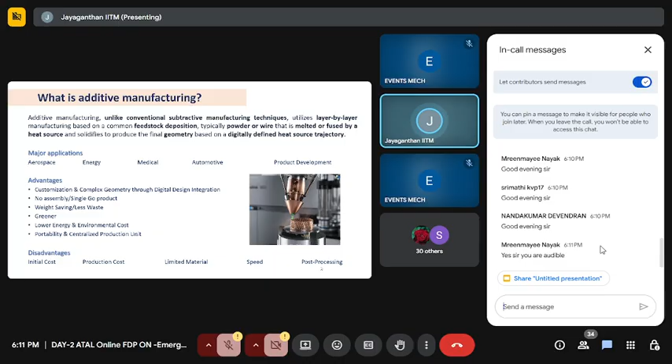I am a professor from the Department of Engineering Design, and Dr. Vinod has already introduced me, so you are all aware. I assume that most of you are from a mechanical background. You have studied manufacturing courses, kinematics and dynamics of machineries, design of machine elements, and a lot of fabrication techniques, for example welding technology and so on. So why additive manufacturing? Yesterday itself this faculty development program started, and you might have already attended sessions on additive manufacturing basics.

So before I discuss in detail today the development of aluminum alloys, note that aluminum alloys are used extensively in aerospace applications due to their very high specific strength.

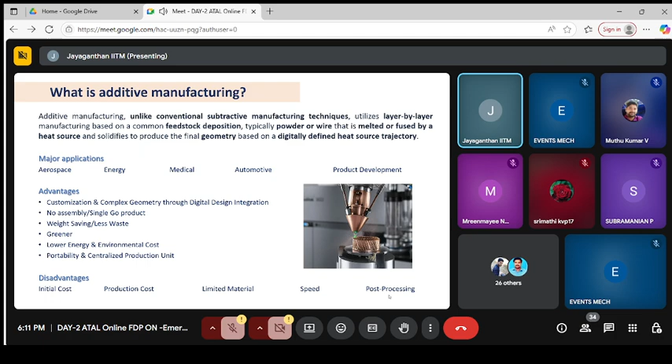Strength to weight ratio is always desirable for all automotive and aerospace applications. We always look for lightweighting, so strength to weight ratio should be very high. Right now, aluminum alloys are already being used in aerospace applications, different parts of the aircraft extensively use aluminum alloys. Of course, high-end aircraft extensively use polymer-based composites also, basically looking for very high lightweight. In fact, the specific strength to weight ratio is much higher for polymer-based composites.

You have already done a course related to manufacturing. Why additive? You know the definition of additive - we always say it is layer by layer deposition of material. Through this process, you end up getting the final shape of the component you want to produce. Rather, I call additive manufacturing a bottom-up approach.

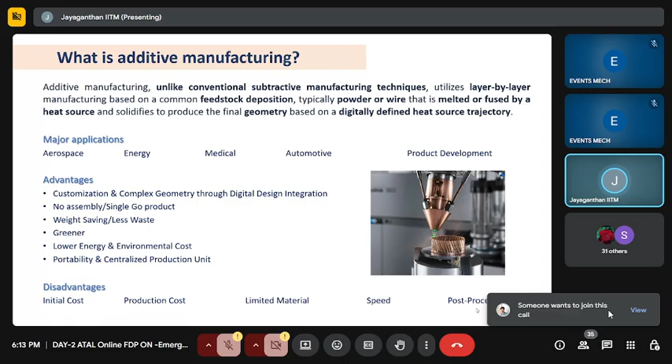In conventional manufacturing, all of you are aware how we get the final component. Right from the beginning, you have to extract the metal or alloys from their corresponding ore or mineral. The molten metal or alloys need to undergo solidification through the casting route. You are all aware about casting and foundry technology. Through casting, you end up getting different shapes - your solidified casting may be in the form of billet, bloom, or slab. You produce a variety of shapes going through this solidification route, and casting could be of different shapes - billet, bloom, slab, and so on.

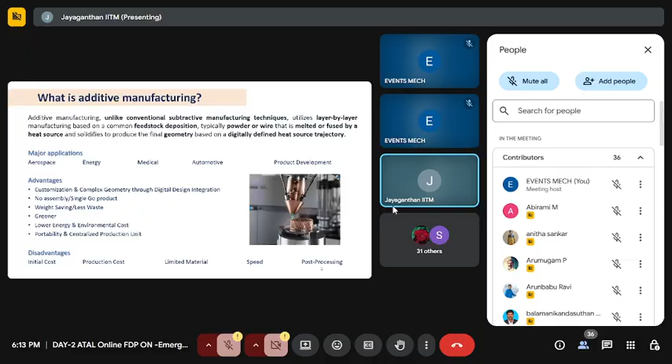These billets, blooms, and slabs are subjected to further processing. Rather, what I want to highlight before going in depth into additive manufacturing, having defined it as nothing but a bottom-up approach wherein we deposit the material layer by layer - in the process, we are also going to discuss what layer by layer deposition means, and how we make use of laser as an energy source to ensure that through layer by layer deposition of material, we end up getting the final shape of the component.

The conventional manufacturing is called a top-down approach. What do you mean by top-down approach? I produce the casting, and the casting needs to be subjected to a variety of thermomechanical processing techniques. You are all aware about forging - open die forging, closed die forging - likewise extrusion also, which has open die and closed die extrusion, and then rolling. If you want to produce a plate, we use the rolling technique, and if you want to produce wire, we use wire drawing.

That means starting with the bulk shape of the casting, you subject it to a variety of thermomechanical operations such as forging, rolling, extrusion. Finally, depending upon the component you want to produce, we make use of a variety of machining techniques to end up getting the final shape of the component. That means subtractive manufacturing is nothing but conventional manufacturing, a top-down approach - you start with the big shape and end up getting the final shape of the component. But in additive manufacturing, we directly get the final shape of the component.

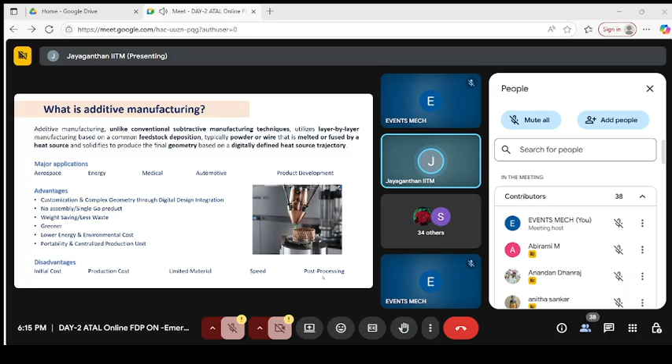Our starting material in this case is either powder or wire. The starting material to do 3D printing of any component begins with either powder or wire. I'm confining my discussion to metallic material - I'm not going to discuss any chemical-based technique for 3D printing of objects. So I want to define additive manufacturing as nothing but layer by layer deposition of material in the form of powder, and each thin layer of powder, when you put it on the build platform, we scan it with the laser.

Like in conventional casting, here in additive manufacturing, the material is spread in the form of powder, and when you scan it with the laser, it undergoes instantaneous melting followed by solidification. This also involves liquid to solid transformation - it involves a solidification process. Since we are beginning with a very thin layer of powder, it is possible to play with the cooling rate. When you use a laser source for a thin layer of powder, I can ensure the whole thin layer undergoes instantaneous melting when the laser strikes it. Basically, I can have very good control over the solidification kinetics, and I end up getting a very good, well-refined microstructure. Likewise, each thin layer, being micron thickness, when shined with a laser, ensures uniform melting of the whole powder layer.

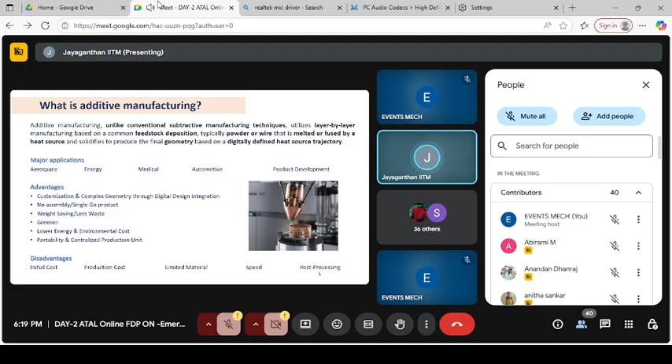Ultimately, manufacturing involves liquid to solid transformation, as you're aware. In additive manufacturing, you're able to have precise control over the cooling rate of the material which undergoes melting followed by solidification. As a result, by appropriately tuning the process conditions, you end up getting a well-refined microstructure in 3D printing, unlike in conventional manufacturing.

In conventional manufacturing, if you want to produce any component, you have to go through a series of steps. At the end, it has to go through a variety of machining operations involving a lot of material removal. Through conventional manufacturing, it takes a lot of time and results in a lot of material loss.

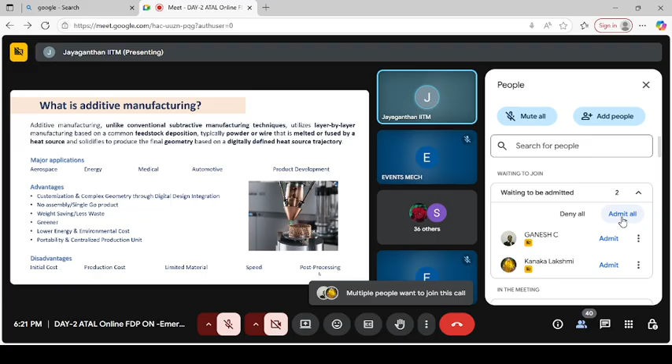So in order to overcome that, we go for the additive route. What I just highlighted differentiates additive from conventional manufacturing. Conventional manufacturing is called subtractive—you begin with a big object and reduce its dimensions to ultimately get the required size and shape of the component. Subtractive manufacturing involves a variety of steps and techniques. There's a lot of material wastage, a lot of time involved, and producing any intricate shape and dimension is very tedious in conventional manufacturing.

Additive manufacturing, as I mentioned, uses a bottom-up approach. We'll also discuss how the process takes place during 3D printing. In 3D printing, we normally give a CAD file from the computer—basically an STL file. When you give the STL file to the printer, the printer understands what kind of shape and size of the component needs to be produced. The printer understands the kinematics—what kind of movement is required—depending on the STL file given. So the laser will accordingly try to do scanning over the thin layer of powder.

I'm also going to show the figure. So hope it's clear right now—I'm just defining what I mean by additive manufacturing and how it's different from conventional manufacturing. And as for advantages, you can see any complex shape can be produced.

Weight saving is going to be much more green compared to the conventional manufacturing technique. In terms of environment also, it is not going to be harmful. And portability—wherever you want to produce the component, we can take the machine there itself, and it's possible to produce the kind of component you want.

The disadvantage is that the initial cost is going to be high, but it can offset. For example, if you take an aero engine component, looking at material cost through conventional manufacturing, we cannot generalize—in some cases cost may be prohibitive, but not in all cases. For aero engine components, additive is better than conventional manufacturing.

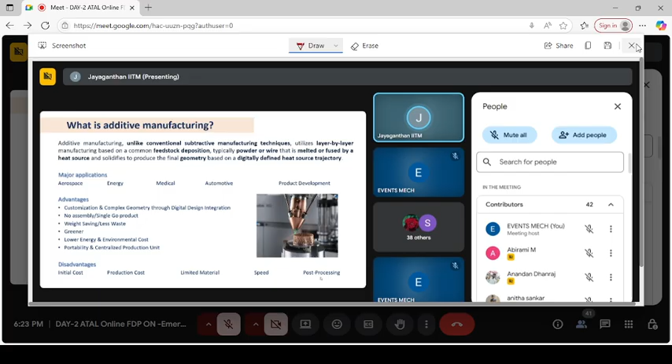Additive has limited material options—we cannot print just any material. First, the powder or wire used for 3D printing needs to be qualified. Does the powder qualify for 3D printing? Powder characteristics in terms of size, shape, purity, and flowability all need to be ensured before taking it forward for 3D printing.

Unlike conventional manufacturing, where we have casting going through a variety of stages requiring a lot of post-processing, the number of post-process steps involved in additive manufacturing is relatively very, very less compared to conventional manufacturing technique.

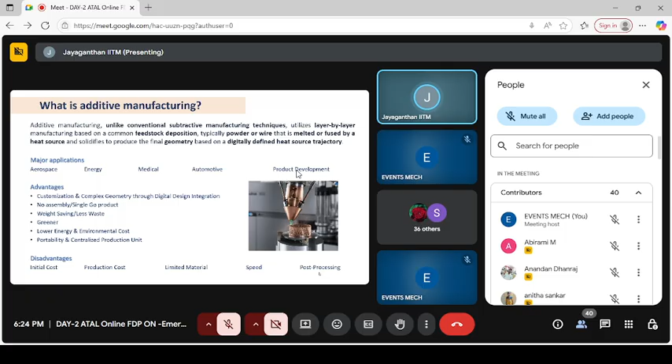And again, if you look at this slide—I hope I'm audible, Dr. Vinod. In between I'll be asking whether I'm audible or not. Yes sir, you're audible, sir.

Please look at this slide, left side—we compare additively manufactured components with traditionally manufactured components. Additive is suitable for low volume production, for example a patient-specific implant or a high performance aerospace engine component. So for low volume production, you can always prefer additive.

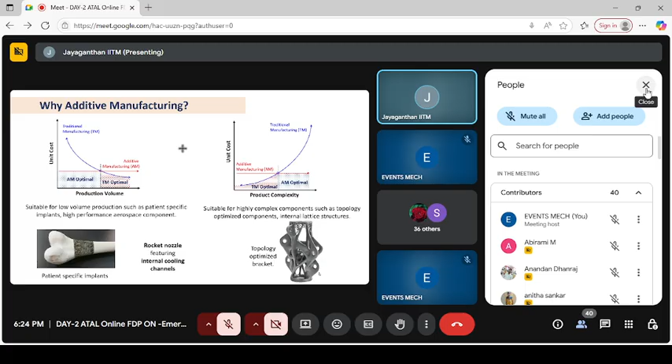On the extreme right, if the shape and size of the final component is very complex, it's better to go for additive rather than conventional. The reason is that producing an intricate shape conventionally might involve a lot of material removal, and you may not end up getting the exact dimensions you're looking for. That's the beauty of going through the additive route.

With the additive route, we begin by giving an appropriate CAD file, and we can do a priori topology optimization for the component through software. At the bottom, we can produce a person-specific implant, and also—as in the satellite rocket example from NASA—a lot of internal cooling channels can be directed to 3D printing.

When it comes to cooling channels, we talk about heat exchangers. The internal feature sizes of a heat exchanger always lie in the range of micron, submicron size. These micron and submicron level features can be produced easily by 3D printing compared to conventional, which is very tedious—you may not be able to maintain the exact size and shape of the submicron features. That's why it's better to use 3D printing.

Just giving one more example—on the extreme right you see a bracket, which may be taking either static or dynamic load. This topologically optimized bracket can be directly 3D printed. So for low volume production, and for highly complex shaped parts, go for additive. The reason is that conventional manufacturing involves a lot of material removal and you may not end up getting the required size and shape of the final component. We are just comparing conventional manufacturing with additive.

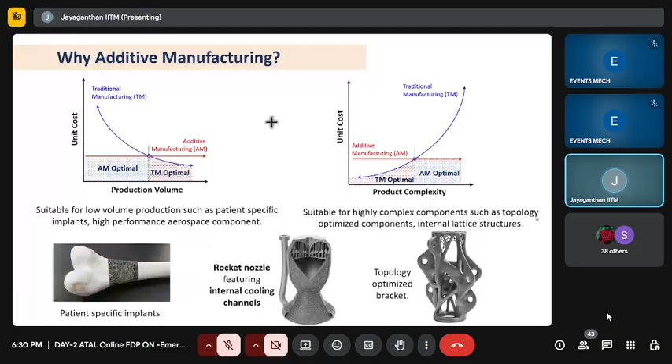That is utilized only for making very complicated size and shape of components, for example the topology optimized bracket I showed in the previous slide — a very complex shaped geometry. Looking at the internal size feature, if it is a few microns or submicron thick, you should always go for the extreme left option.

I'm just saying that with respect to use case or application, you have to pick the appropriate additive manufacturing technique, using either laser or electron beam melting. I'm trying to highlight metal-based 3D printing and what techniques are available. We have a lot of 3D printing machines in India, but if you do proper auditing, you'll find more than 50% of the machines are idle.

A lot of private players buy the machine and only want academic institutions to come and do printing, paying money to them. Some companies come forward to collaborate and try to develop prototypes jointly. But most of them just buy the machine, and it is not being effectively used. Simply, it is imported from abroad.

For information, 3D printing machines are now made indigenously in India. There is one company, Intech in Bangalore, that produces low cost 3D printers. It's now possible to get a 3D printer for just 70 lakhs, whereas it used to cost 3 crore, 4 crore. Now the price has come down.

We are equally capable of producing indigenous machines for electron beam melting as well as selective laser melting. The laser source is critical for developing a 3D printer, and laser sources are also made in India. If you are aware of RRCAT, one of the Department of Atomic Energy units, they are also producing laser sources there.

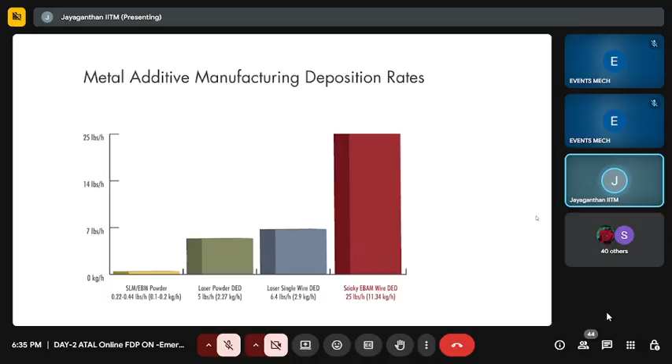At the end, you will be able to make the actual machine. Once your design details are clear, having done the simulation, you can take these details to a manufacturer who can assemble each individual part. As I mentioned, you can buy the laser source from India, and you can buy individual spare parts and assemble them. It's possible to make a 3D printing machine this way. If you look at the extreme left, basically we have a vacuum chamber where we can make use of inert gas like nitrogen or argon gas.

Extreme left, what you see is basically the build platform. You just put a thin layer of powder, and we use a recoater blade to ensure we have a uniform thin layer of this powder.

When it comes to the extreme right, you can see the role of the laser beam, so it does scanning. There are several scanning patterns, it can be zigzag pattern, meander pattern, the way it has to scan. That depends upon what kind of typical dimension you require for the particular final component you want to make.

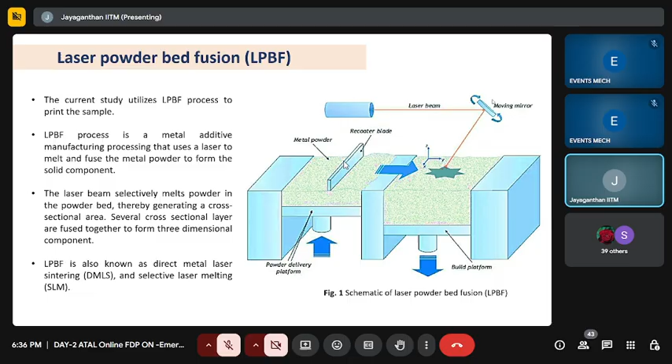So laying a thin layer of powder, scanning it with a laser, is done repeatedly layer by layer. The layer undergoes melting and solidification instantaneously, it forms a thin solid, and again a second layer of powder is laid over the platform. Again, laser is scanned. This process is continued, ending up in getting the three-dimensional shape of the final component you want to produce.

Before you go for making the actual component, what they try to do first is establish properties for the material. For that, they try to print a test coupon. What do I mean by test coupon? First of all, you have to ensure the material being printed through this laser-based technique has its material property ensured. I cannot go straight away for printing the final shape of the prototype.

My seminar is basically to characterize 3D printed material, where it is capable of providing desired mechanical properties similar to conventionally cast material. You can say it may be wrought alloy or cast alloy.

First, you need to qualify the material property. Material is being produced through 3D printing, we call it a test coupon. Once you ensure the test coupon material printed provides required static and dynamic properties. When I say static properties, I'm talking about tensile strength, compression strength, and fracture toughness. When I say dynamic properties, I'm talking about fatigue strength, and cyclic load, how the material is going to behave.

Once you establish properties of the material which is 3D printed, then I can take the material property as an input to design the prototype. What is a prototype? Prototype is nothing but the material with the required property that has taken a particular shape and size, that I call a prototype.

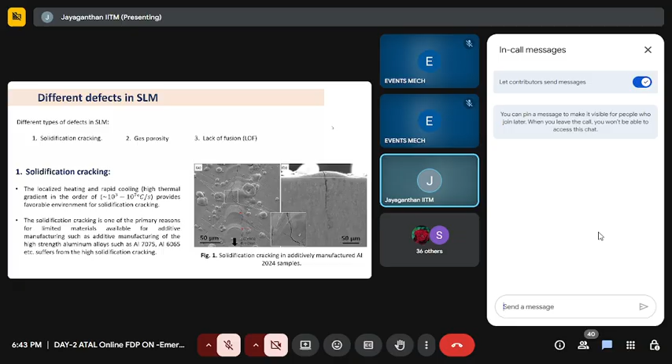Internally in casting you might have some cracks; this is one of the major issues. There could also be porosity, which forms due to complex phenomena associated with the laser powder itself. If you don't use appropriate laser energy, you end up seeing this kind of problem, for example metal may evaporate, which in turn causes entrapment of gases.

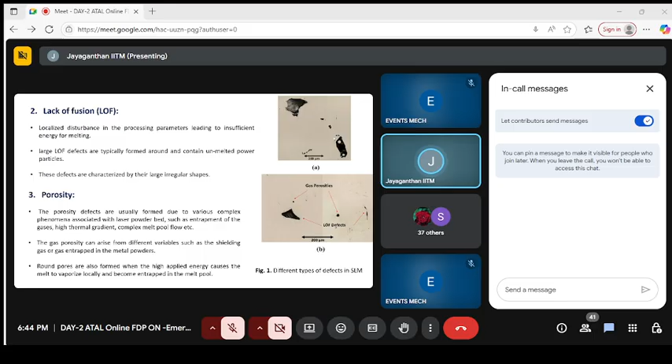That's where laser energy density needs to be known for each material. Laser energy density is expressed as E equal to laser power P divided by scanning rate and hatch spacing. Hatch spacing is the distance between two adjacent beams, the interlayer distance. That we call hatch spacing, and then there's layer thickness. All these parameters are used for a given powder.

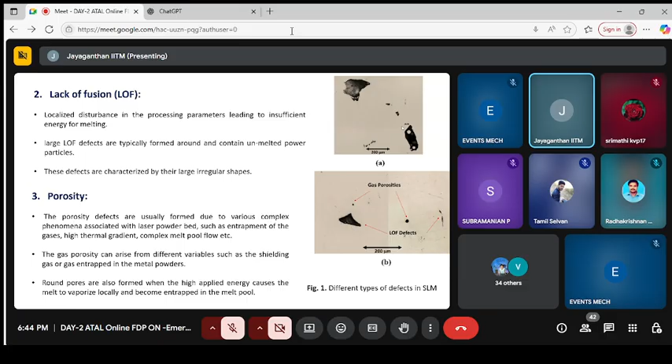If you don't account for appropriate laser power, or laser energy density, you end up seeing the problem of porosity or even lack of fusion, whether due to under-melting or even vaporization. All these problems are encountered if you are not properly accounting for the process parameters used in selective laser melting, also called laser powder bed fusion.

All these effects are seen if you try to print aluminum 2024 or 7075 alloy, because a very huge cooling rate is imposed on the material when you do 3D printing. We've seen the cooling rate is of the order of 10^3 to 10^7 degrees centigrade per second. Because of differential expansion and contraction, you cannot escape the formation of cracks when you go through 3D printing, even through the conventional casting route.

Before I discuss 2024 being 3D printed, why do I have to go for 3D printing 2024? Rather, my discussion is about 2024 alloy added with titanium. That is the main focus of my talk today.

Aluminum 2024, if you do direct 3D printing, you encounter all these kinds of problems. Even if you account for proper process parameters, due to differential expansion contraction, solidification cracking cannot be avoided. Maybe you'll be able to take care of lack of fusion and gas porosity, but solidification cracking you are not able to take care of when you go through 3D printing, even with appropriate process parameters.

Then what is the remedy? That's what I'm going to discuss now. Before we discuss how 2024 is modified before we go for 3D printing, let's look at what is the specialty of this 2024 alloy, and look at the particular alloy composition.

Aluminum is the major principal element. What are the other alloying elements? You have copper, magnesium, titanium. Each series - 2000 series, 5000 series, 6000 series - each is unique with respect to a particular use case, unique in terms of what kind of property it can provide. I'm referring to 2024, made up of major element aluminum, plus copper, magnesium, titanium.

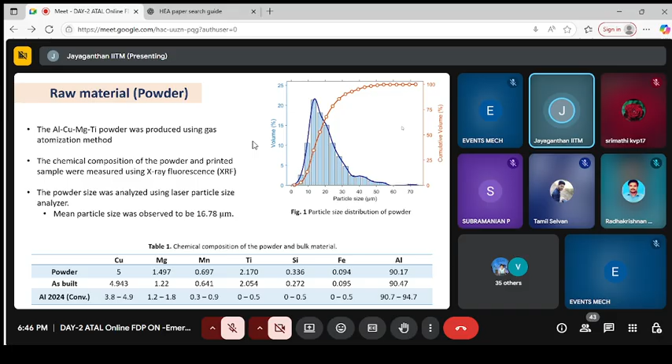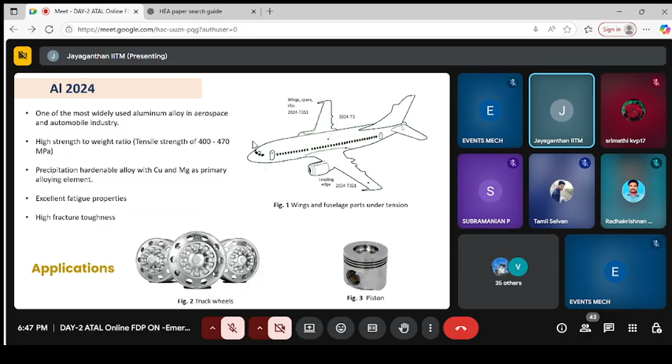Strengthening mechanism in the sense, why are we adding additional alloying elements? Why not use pure aluminum? Pure aluminum cannot give the required mechanical properties. That's where we add further alloying elements. These alloying elements end up forming different phases, different precipitates, and those precipitates contribute to strengthening the alloy.

When I say strengthening the alloy, we want to improve the tensile strength without losing the ductility. We want the combination of both strength and ductility, as well as improve the fatigue life - how the component behaves under dynamic load. That's why we're adding alloying elements: they account for improving or strengthening the alloy properties. That's why it is a precipitation hardenable alloy.

Copper and magnesium form precipitates - that's what we are going to discuss. You can see the wing parts, spars, ribs - they're all made using 2024 aluminum alloy. At the bottom, you can see the leading edge. The wings and fuselage parts in the aircraft are fabricated using aluminum 2024 alloy. Also, automotive applications like truck wheels are fabricated using 2024 alloy, and pistons also are made using aluminum 2024 alloy.

As I mentioned, you always end up seeing solidification cracking - you see the microstructure cracking if you do 3D printing of 2024 alloy. This is a major problem due to differential expansion and contraction; when solidification takes place, we end up seeing the crack, as shown in figure one. Also, through the additive route when you do 3D printing, at a much bigger length scale - 50 micron length scale - we get what's called columnar grain, looking like a pillar-like structure. Columnar grains also don't provide the desired properties, unlike, for example, equiaxed grains.

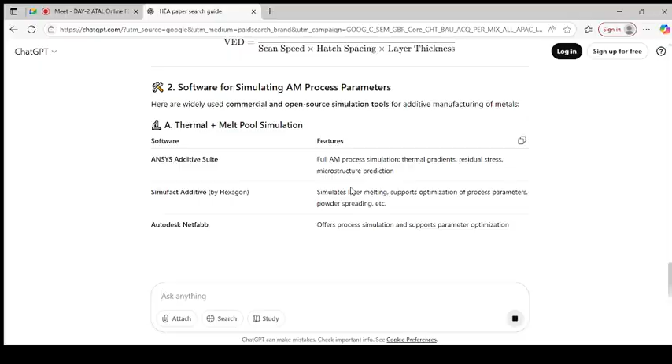We already made a virtual prototype, and we are in the process of making the real prototype engine mounting bracket, which is currently being printed. Once we do 3D printing of the engine mounting bracket, we'll give it to NASIC, Indian Air Force. They'll be able to do field testing and then qualify the particular bracket. Once it is qualified, in future, like we talked about Atmanirbhar, we want to make everything indigenously wherever possible.

It means we start with the material, we establish properties through virtual simulation. Anything you can make through simulation, you can virtually create. We made a virtual prototype, and now, since we have all design details and process details, we are in the process of making the actual prototype.

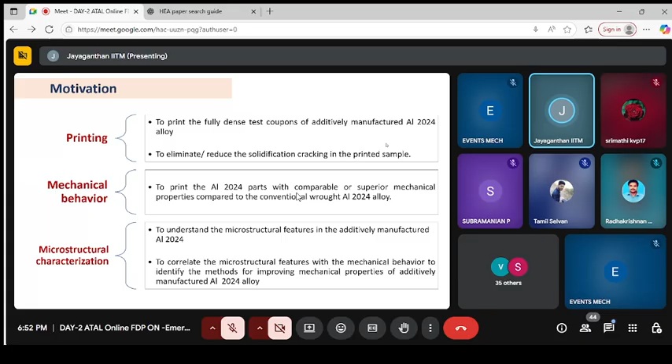Once you do 3D printing, before you try to do mechanical testing, the internal microstructure needs to be thoroughly characterized. I'm also going to discuss what microscopy we use to understand the internal microstructural features. The reason is, it's not only the chemical composition of the alloy, we need to account for the internal microstructure, looking at internal grains or crystal size.

You're all aware that any metallic material is called polycrystalline, meaning it's made up of several crystals or grains. Several grains aggregate to form the microstructure. When you look through the naked eye, it's a continuum, but if we see through the microscope, it is basically a heterogeneous microstructure.

Depending upon the alloy, we need to see whether it is a single phase or two phase alloy, and what kind of crystal structure it has. All such things are equally important. At the microstructural length scale, going from submicron to millimeter, size and shape matters. At the macroscopy level, the dimension of a component influences what kind of stress it is going to accumulate.

You've done rigid body mechanics, where you do force balance, and strength of materials or deformable body mechanics, where depending upon the complexity of the component, when it takes up load, if it deforms, we have to account for that, including plastic strain. At the smaller length scale too, as a mechanical person, I always look at any object's dimension - its length, breadth, and width.

Same thing, you try to visualize at the material length scale, everything at the micron, submicron, and millimeter length scale. What is the internal grain or crystal size like? Is it spherical, non-spherical, needle-like structure? I mentioned about lamellar morphology, it looks like a plate-like structure. Each internal feature I look at as a mechanical person - what is the geometrical feature?

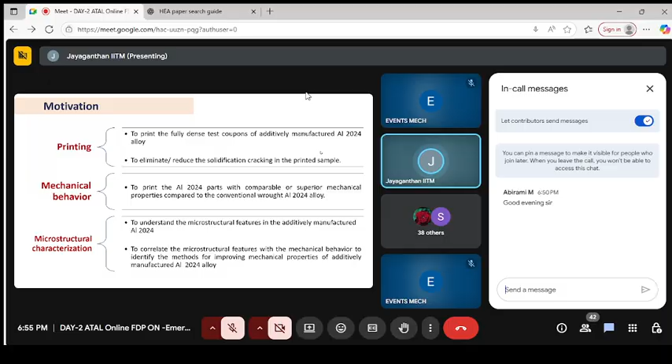For structural application, we are looking at load-bearing applications where mechanical properties are critical. We need to see how the microstructure is going to influence a property. That's why we are concerned - when you do 3D printing, the process is going to influence microstructure, and microstructure in turn is going to dictate the property. That's why we need to understand and critically control microstructure.

That's why it's called microstructural engineering of material produced by several routes - it may be casting route or through 3D printing route. What I mentioned earlier was one unique feature of 3D printing - you're able to have precise control over the microstructure being formed through layer by layer deposition of material. Unlike conventional manufacturing, where you start with a very big chunk of mass that undergoes melting and solidification - you pour the molten metal into a mold, a very big shape, and you cannot have uniform cooling from surface to bulk. That's why you end up seeing heterogeneous microstructure.

Surface may be well defined, but if you go internally across the cross section, the core will have segregated microstructure - rather, we can say dendritic microstructure and so on. I'm talking about the huge variation in microstructure properties when you look at a conventionally manufactured part. Of course, we do further post-processing to make it a homogeneous structure. We're just comparing one to one - how unique the 3D printing technique is compared to conventional, being a bottom-up approach, they're able to have precise control over melting and solidification.

So methodology - we did 3D printing, and the sample was printed in horizontal direction as well as vertical direction. Then we gave post-processing heat treatment as well. So any material produced by a different route, we have to look at as the as-fabricated sample, followed by post-processing if it requires. Predominantly we play with the heat treatment - most conventionally produced material, we always play with heat treatment to improve the properties further. Once you give the heat treatment, again the microstructure undergoes transformation.

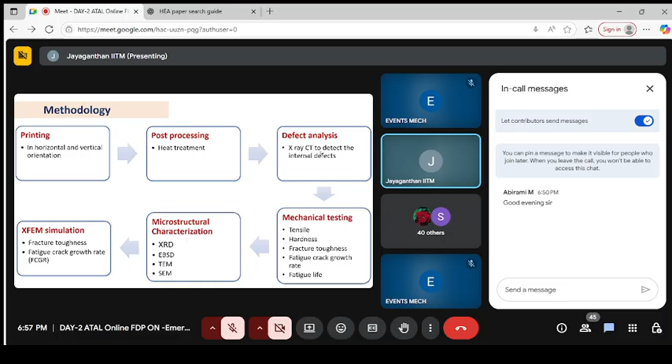So after post processing, for the 3D printed sample we did NDT analysis through X-ray CT scan to see whether there are any internal defects in the 3D printed sample or not. Having done thorough characterization for the as-printed sample upon heat treatment, followed by analyzing internal defects using X-ray CT scan, all the 3D printed samples - I mentioned the 3D printed test coupons - went through all testing: tensile test, hardness test, fracture toughness, fatigue crack growth rate, fatigue life, and of course microstructure characterization using XRD and EBSD, electron backscatter diffraction.

Again, I will discuss how the feature size looks like if you do EBSD. We also have TEM, transmission electron microscopy, and scanning electron microscopy. All these techniques were used to characterize the physical features of the material, which is 3D printed.

Of course, we did FEM simulation also for all the properties. FEM simulation and XFEM simulation is a unique technique if you want to account for discontinuity in the material, like a crack or discontinuity. You don't require mesh refinement, remeshing is not required if you make use of the XFEM technique, but I will not cover that right now.

I only want to discuss how we did 3D printing, their mechanical properties, how they look as printed sample, and then post-processed sample. And we went through characterization to look at their internal microstructural features that are internally related to the properties actually.

And again, what I mentioned was, for aluminum 2024 alloy, you have a problem of solidification cracking. What we did in our work, we added 2% titanium to the starting alloy, aluminum 2024, whose composition I already mentioned.

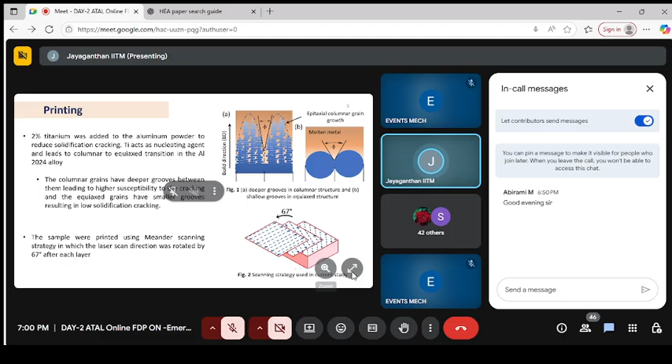So you try to see extreme left and extreme right. If you use pure aluminum 2024 alloy without adding titanium, you have a columnar-like structure, pillar-like structure. And you can see in between two columnar grains you have a groove, a deep groove - that is the one being the culprit for inducing solidification cracking.

But if you use 2% titanium added to the aluminum 2024 alloy, it refines the microstructure. The so-called equiaxed structure is spherical, they are all same dimension in all directions. So the cavity, the groove, is completely filled with the molten metal. We end up getting equiaxed structures.

So it's able to take care of solidification cracking. Titanium is acting as a very good grain refiner. So with 2% titanium added aluminum 2024 alloy, if we do 3D printing, we are able to overcome the solidification cracking - that's what we want to highlight.

2% titanium has been added to aluminum 2024 alloy. The starting alloy powder itself contains 2% titanium that acts as a grain refiner - that's why we mentioned the bullet point: the columnar grains have deeper grooves between them, leading to higher susceptibility to cracking, while equiaxed grains have smaller grooves, resulting in very low solidification cracking.

So how do we take care of solidification cracking? We added titanium as a grain refiner. As I mentioned, during solidification, the liquid to solid transformation, it's possible to control the microstructure being formed. I already mentioned columnar structure, equiaxed structure, lamellar structure - there are different morphologies, going down the length scale from millimeter to micron, submicron.

The internal microstructure - I'm looking at the physical feature, size and shape of the particular grain or crystal. The equiaxed structure is desirable for 3D printing of titanium-added aluminum 2024 alloy. The role of titanium is that it's able to modify the grain shape from columnar to equiaxed structure.

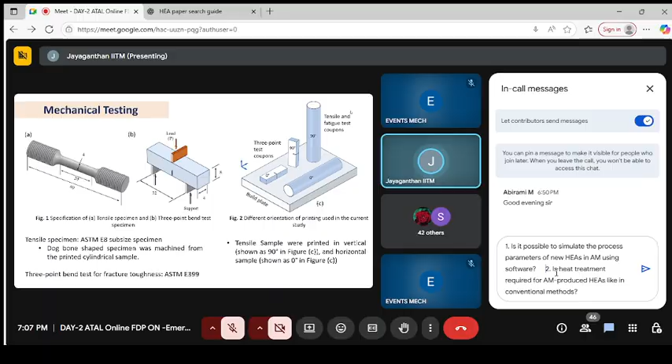Again, samples are fabricated vertically built or horizontally built - the orientation also matters. Different orientations of the printed sample, that also we used. Tensile samples were printed in vertical direction as well as horizontal direction, because we want to know whether orientation is going to matter for the final properties of the material being 3D printed.

So we went through all this testing, different test coupons were made. The defects were also analyzed through X-ray diffraction and X-ray CT scan.

Internally, if you have not accounted for proper process parameters to do 3D printing, I would like to highlight once again: laser energy density, expressed as capital E, is laser power P divided by scan speed, at what rate you're scanning the laser over the powder. And then I mentioned about hatch spacing.

We have a laser beam, two adjacent beams - what does that distance actually mean? Whether you're using lower hatch spacing or higher hatch spacing, that is going to matter a lot, connecting to deposition rate. And then the layer thickness.

In laser powder bed fusion, on the build platform, you lay one thin layer of powder. You need to know the thickness of the layer, the laser scanning rate, and the hatch spacing to the adjacent laser beam - I'm referring to the laser beam's spot size. So hatch spacing also plays a role in determining what appropriate energy density should be used for 3D printing of your material.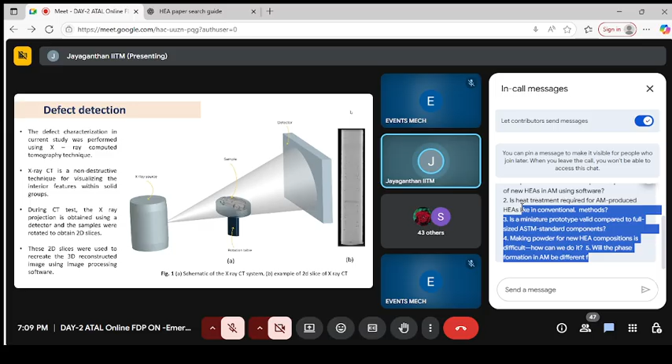So these internal defects - why do we use X-ray CT scan? The internal defects are not visible to the naked eye. It may be micron size pore or even millimeter size pore. Millimeter size pores you can see through the naked eye, but if it is micron or submicron, I have to do X-ray CT scan to analyze internal defects.

Once again, when you do 3D printing, what is the final density of the 3D printed part? It cannot be 100%, because powder is undergoing melting and solidification. Even accounting for optimized process parameters, the density can never be 100%. There could always be internal defects, minor porosity content.

That also needs to be analyzed through X-ray CT scan. We will come to know whether it is a poorly packed 3D printed part, and what the internal defects are, for which you need to do thorough scanning through X-ray.

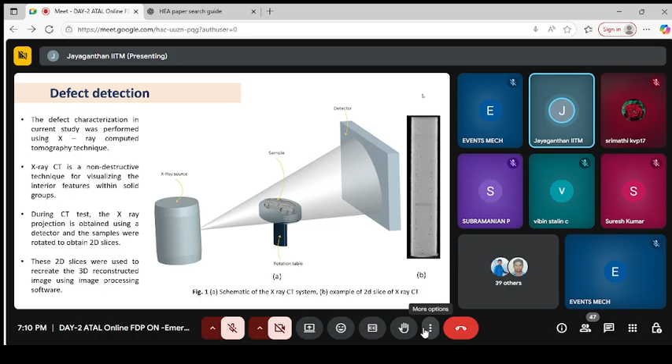3D printed material should undergo thorough scanning through X-ray. Please see what the defect is - not only seeing the presence of defect, but what is the quantity of defects being present and how they're distributed. That also needs to be quantified for 3D printed materials.

That again we try to relate to thermal gradient. Obviously cooling rate and how the heat dissipation occurs matters a lot depending upon whether it is vertically built or horizontally built. We are trying to highlight that horizontally built samples have a lot of defects due to thermal gradient compared to vertically built samples - the way heat is dissipated when it undergoes controlled solidification from liquid to solid transition.

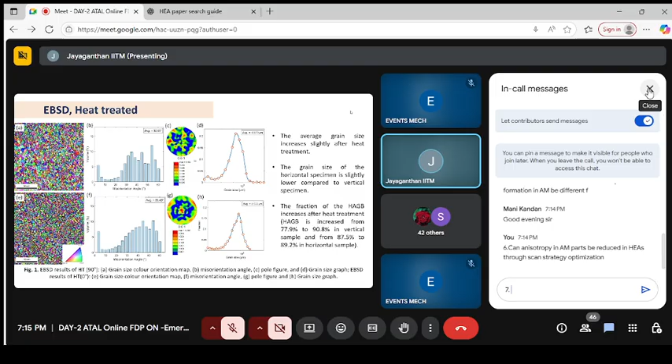That also we want to characterize - what is the volume fraction of high angle grain boundaries and low angle grain boundaries and so on. That is also what we are saying with the heat treatment - what is happening to the horizontal build sample and vertical build sample. And then if you do X-ray diffraction, you can see at the bottommost.

We have seen the physical features. As I mentioned, the alloy containing aluminum plus other alloying elements - they have the powder, we did 3D printing. For the 3D printed sample, we have to do X-ray diffraction to see what phase it shows.

You all know the meaning of phase - we have solid phase, liquid phase, it may be vapor phase. Ice is solid - it undergoes melting to liquid, and if you boil it, it goes to vapor state. Solid state, liquid state, vapor state - we call it a phase. Within the solid itself, we have seen the microstructure. What is the morphology? When they mix up with each other, how many phases do they end up forming?

Is it going to be single phase? It will have only one single crystal structure. When they say two phase alloy, the two phases will have different crystal structures. When you add alloying element, to what extent can you keep adding before they end up forming an alloy or solid solution? There is a limit beyond which they end up forming another unique phase.

That's where we end up doing X-ray diffraction, right from the powder. We did as-built sample, 3D printed sample, vertically built at 90 degrees, horizontally built at 0 degrees, and heat treatment also for both samples. And what did we see? What phase is observed?

The primary element for this alloy is aluminum, indexed in this X-ray diffraction as alpha phase. Having alloying elements like copper and magnesium, we end up getting a unique peak for the presence of a precipitate, that is Al2Cu precipitate, which we call theta, having a particular crystal structure.

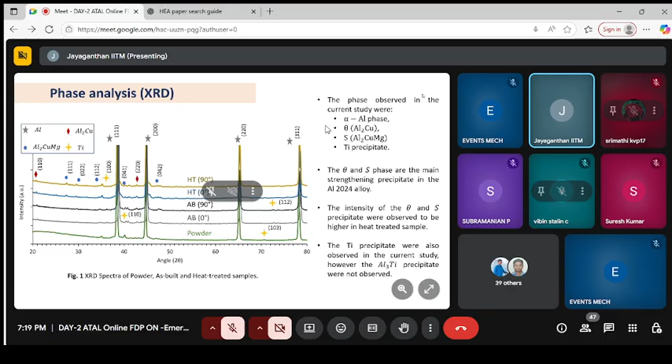For the post-processed and heat-treated sample, the intensity of the precipitate has evolved in size and shape by giving heat treatment. Titanium also was observed, but in the form of pure titanium, not in the form of a compound like Al3Ti precipitate, which were not observed in our study.

Again, looking here through scanning electron microscope, what do we see, whether we get any signature for the presence of titanium. SEM was not giving a detailed picture. By doing TEM, we are able to identify it.

The transmission electron microscope is another technique wherein we can go much deeper in length scale. We can look at nanoscale pictures, even atomic length scale, nanometer length scale. If any precipitate phases are found, we can detect it through this transmission electron microscope.

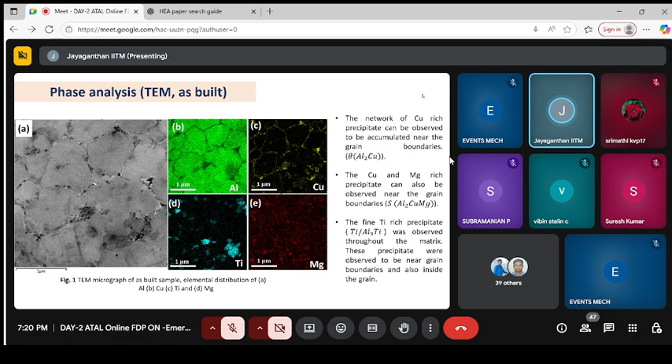Having mentioned that it tends to form theta precipitate and S precipitate, their typical precipitate size is almost submicron size, which we wanted to highlight by doing TEM. We did this for as-built sample as well as heat-treated sample. Their size and shape tend to change. We characterize the precipitate formed through SEM and TEM to look at morphology, how they look like.

Having done a complete tensile property and hardness property study, what I want to conclude, if you look at, you can see on the extreme left. Hope this slide is visible for all of you.

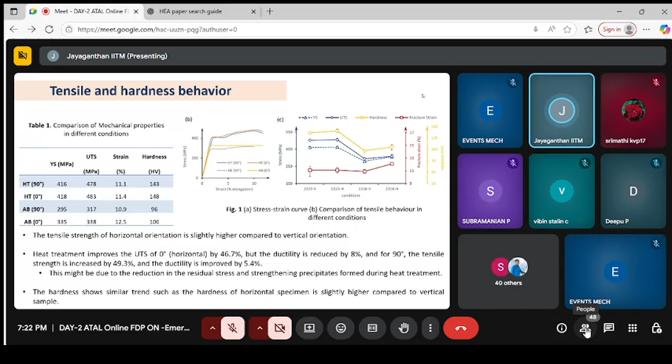Just to highlight what you see in this stress strain curve: AB refers to as-built sample, HT is heat-treated sample. We want to highlight the tensile strength and hardness. To generalize, the heat-treated sample provides better properties compared to the as-built sample, even as compared to conventionally prepared material - they provide better properties for both as-built sample as well as for heated samples.

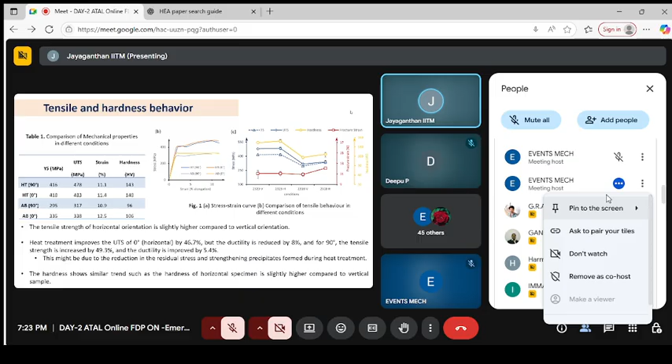Having done the tensile test, we want to understand the mode of failure, so we have done thorough fractography. For any failed sample, we want to understand the microstructural mechanism - what has contributed to the failure of the sample. This can be done by using SEM-based camera as well as by TEM.

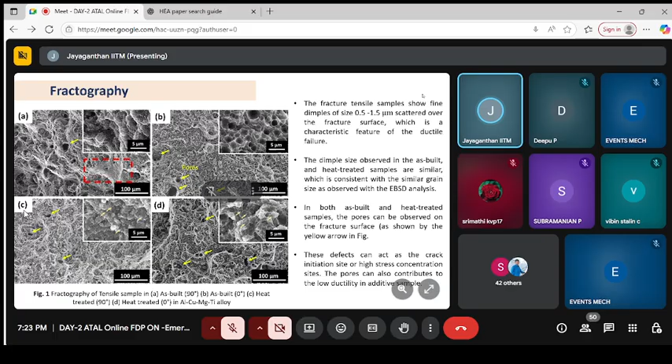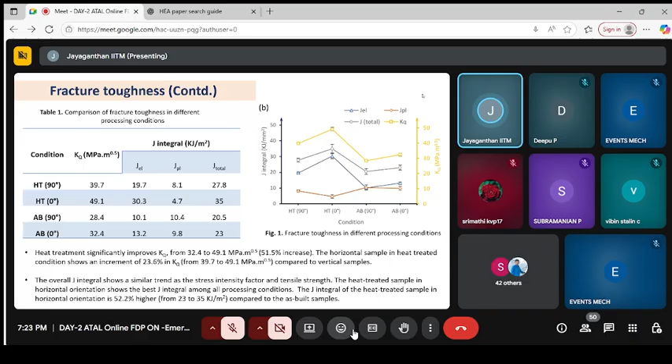We also did a 3-point bend test to study the fracture toughness of this 3D printed material. We are able to show that the heat-treated sample provides better property. There we use a term called fracture toughness KQ and the J integral. The J integral takes care of how much plastic strain the material can take, which indirectly dictates what would be the fracture toughness of the 3D printed sample as well as the post-processed sample.

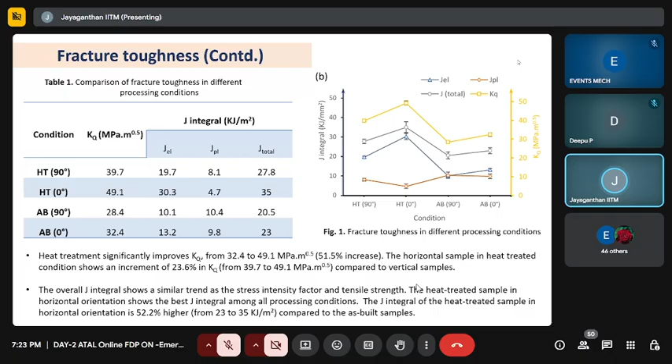What I want to highlight, you can see from this table, the heated sample provides better fracture toughness.

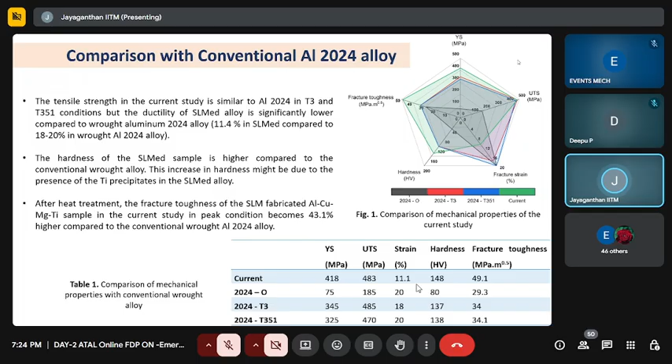To highlight this whole discussion, for the 2024 alloy produced by other routes - 2024 O, T3, T351 - these refer to different heat treatments. We have compared material produced by 3D printing, our titanium added aluminum 2024 alloy, looking at yield strength, ultimate tensile strength, percent strain, hardness and fracture toughness, compared with a conventionally prepared alloy. You can see this from the table.

This slide also compares additively prepared 2024 alloy. I have to benchmark - just doing printing, characterizing, and reporting has no meaning. What I produced must be compared with what is already known. That is shown in this slide - you can see yield strength, ultimate tensile strength, hardness, everything is depicted here.

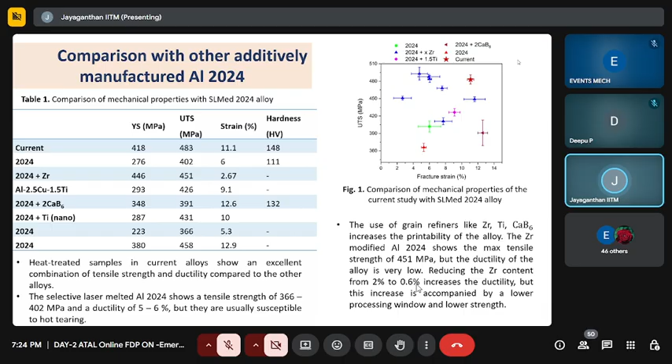Numerical simulation I'm not going to discuss right now.

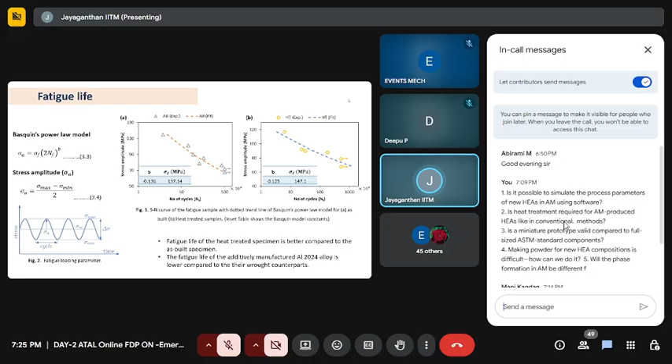Stress amplitude is connected to sigma f, which is the fatigue strength coefficient. N is nothing but number of cycles. B represents the strength exponent. So we have the values b and sigma f having fitted the experimental data to this power law fit.

We are basically quantifying high cycle fatigue, and on the extreme right side we also show the heat treated sample. We want to highlight that the fatigue life of the heated sample is better compared to the as-built sample, due to microstructural refinement or transformation. The heated sample provided better fatigue properties. Again, stress versus number of cycles to failure - look at the loading pattern.

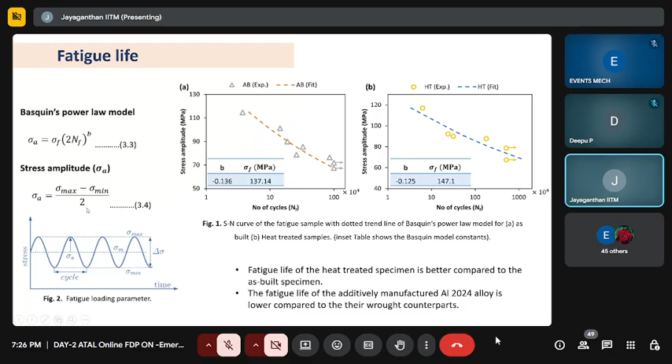Look at the loading pattern. We use the term stress amplitude when it comes to fatigue life - you should know what is stress amplitude: sigma max minus sigma minimum by 2, this we call stress amplitude. You need to understand the different terminology when you want to study fatigue life.

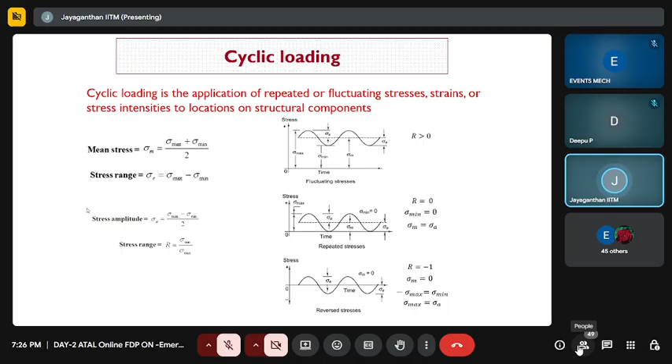What do I mean by mean stress? Mean stress is sigma max plus sigma minimum by 2 - you are applying the load maximum to minimum, that is mean stress. Stress range is the difference between sigma max and sigma minimum. Stress amplitude we highlight as sigma max minus sigma minimum by 2. Stress range, capital R, is the ratio sigma minimum to sigma max.

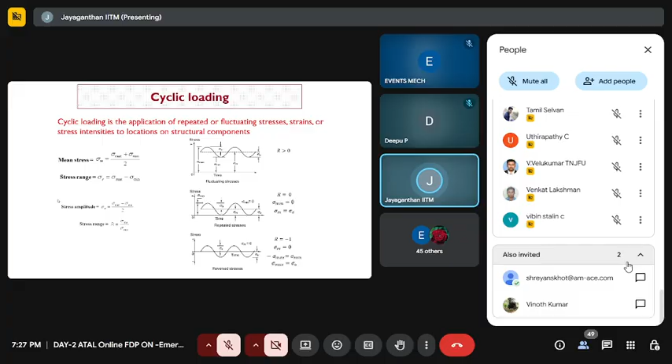We want to look at the loading pattern of the parts. When you do fatigue testing of any material, you need to understand all these terms: mean stress, stress range, stress amplitude, stress ratio capital R. Look at the different loading patterns - if it happens to be fluctuating stress, R is greater than 0. If it happens to be repeated stress, R equals 0.

Having defined stress range as sigma minimum to sigma max, if it happens to be reverse stress, look at the R value. We do fatigue testing of the sample with respect to what R value is being kept. The loading pattern could be periodic, or even a variable loading pattern with variable amplitude. We are trying to highlight the role of mean stress, stress range, stress amplitude, and stress ratio - whether the loading pattern is fluctuating stress, repeated stress, or reverse stress. When I say reverse stress, what do the plus and minus signs indicate?

You will have tension, or tension-compression, or compression. So with dynamic loading, when the load is acting on the sample, is it tension or tension-compression? You should know the loading pattern. That's where we characterize in terms of fluctuating stress, repeated stress, and reverse stress, and so on, when you do fatigue testing of the sample.

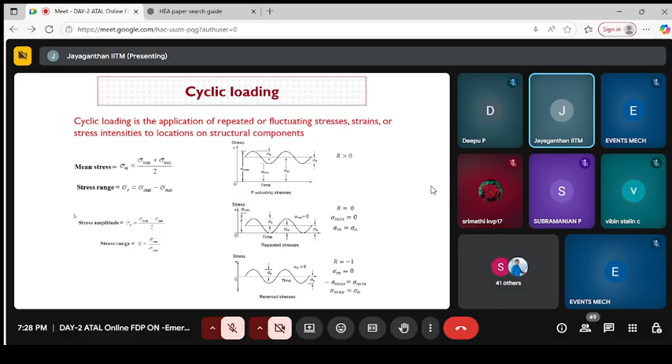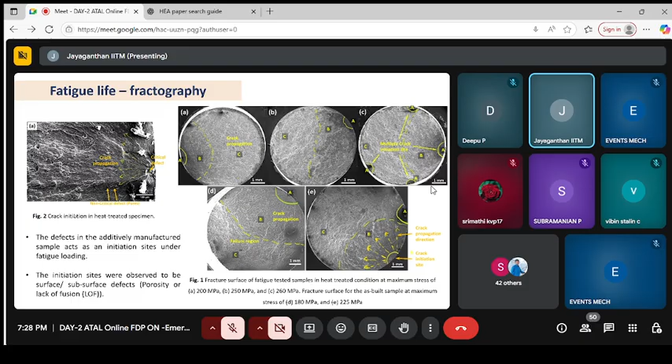In the previous discussion, we assumed you are applying the load under dynamic conditions - tension, compression, or a combination of both - without accounting for the presence of internal cracks. The moment you have a crack inside the sample - I mentioned it might have pores or cracks inside the material - you need to understand the role of cracks or flaws present in the material.

That's where we need to do fatigue crack growth studies, for which you can make use of a CT sample, compact tension sample. Again, using a UTM machine, you can apply the load and continuously track the growth of the crack, how it moves across the cross section of the sample.

We want to understand at what rate the crack is moving. In a metal sample, the crack will move very fast under dynamic load conditions with fewer cycles, and the sample will fail. That's why it's important to understand how a crack present in the material behaves when load is applied dynamically due to tension-compression. As compared to the grain size responding to the applied load, the internal crack tends to respond faster, moving across the cross section. When it moves fast across the cross section of the specimen, the sample ends up breaking into pieces.

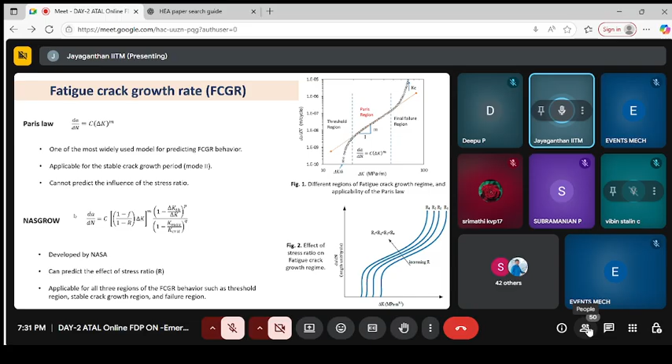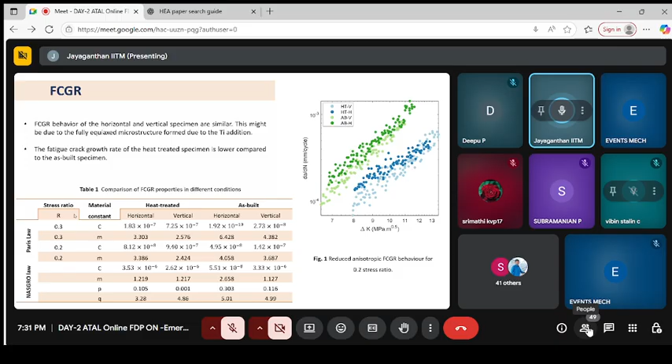On the extreme right side, we highlight crack growth rate versus stress intensity factor. The conclusion is that the heated sample provides better properties. Comparing again with conventionally produced wrought aluminum alloy, we highlight that the fatigue crack growth resistance of the 3D printed sample is poor compared to the wrought alloy. However, the 3D printed sample followed by post-processing provides better fatigue properties compared to conventional wrought aluminum 2024 alloy.

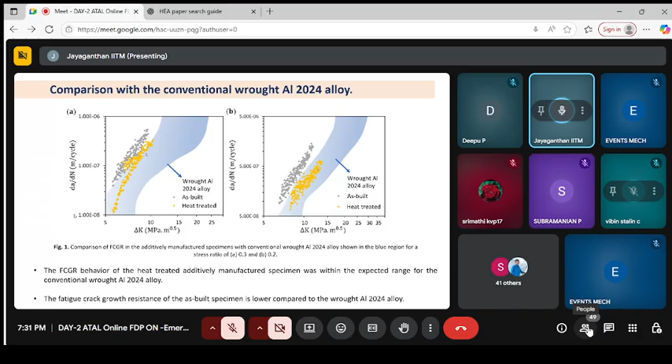The beauty of XFEM is that it accounts for discontinuity in the material. For crack movement, you don't require intensive mesh refinement, and remeshing is not required if you use XFEM. The uniqueness of XFEM is that you are able to use a special function. If you've done an FEM course, we talk about shape functions; here we use a special function. When doing FEM modeling of the specimen, we account for discontinuity by introducing this special function, so we don't need to do continuous remeshing of the object after the initial meshing through meshing software.

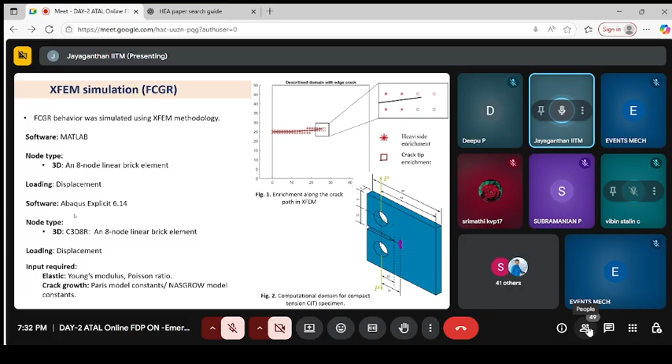So I will not go further into that. To conclude, we are able to produce an ultra-fine grained microstructure using titanium modified aluminum 2024 alloy through 3D printing. We are able to prove it provides better tensile and fatigue properties compared to conventionally produced aluminum alloy. Having established these properties, we did virtual prototyping of an engine mounting bracket for aircraft application with significant weight reduction without compromising properties, and we were able to improve both static and dynamic properties.

Now the design is known and the process parameters are known. We printed the 3D sample, qualified its properties, and then did virtual prototyping as well. Now we are in the process of making the actual prototype before putting it to use in the actual field. Again, this particular bracket is a non-critical part, so we can easily test and qualify it, and we can go for making it indigenously within India.

So with that, let me conclude.

I would like to thank one of my students for this whole work, Dr. Saurabh Goyrala. He has published around 6 to 7 papers, and he has also filed a patent on titanium modified aluminum 2024 alloy. He has already filed that patent, and for the virtual prototyping work, we are in the process of filing another patent now. Once we make the real prototype and it gets qualified, we can go for yet another patent.

So whatever we do, we want to take it from material to the prototype and where it is going to be used, not only publishing paper alone. Need of the hour, we need to focus towards developing our own indigenous components for our own Indian use. We cannot keep importing from abroad.